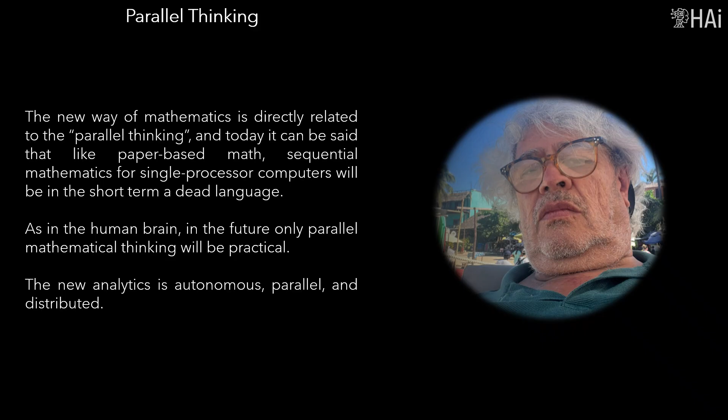The new way of mathematics is directly related to parallel thinking, and today it can be said that like paper-based math, sequential mathematics for single-processor computers, will in the short term be a dead language. As in the human brain, in the future only parallel mathematical thinking will be practical. The new analytics is autonomous, parallel, and distributed.

Oil and gas multi-problem models. OPTEX is the HAI optimization expert system which, since 1990, has been handling multi-problem models.

In 2009, Oil Express hired HAI for the design and prototype implementation in GAMS of decision support systems for the optimization of energy resources. The integrated model included production of crude oil, transportation of crude oil, oil and biomass refining, and transport of refined products. The project involved designing and implementing an integrated model that links all steps of the supply chain of petroleum products, with emphasis on the consumption and marketing of the energy used by the network.

HAI-OIL-EWO is the base for the formal implementation of the value chain model for Oil Express. At that time, the work developed was the birth of the concept of an artificial brain for the oil and gas industries.

Artificial brains are based on artificial intelligence and mathematical programming integration. The artificial brain is the evolution of DSS under the Industry 4.0 revolution, conceptualized as a set of mathematical models that exchange information autonomously between them, working online, using distributed optimization.

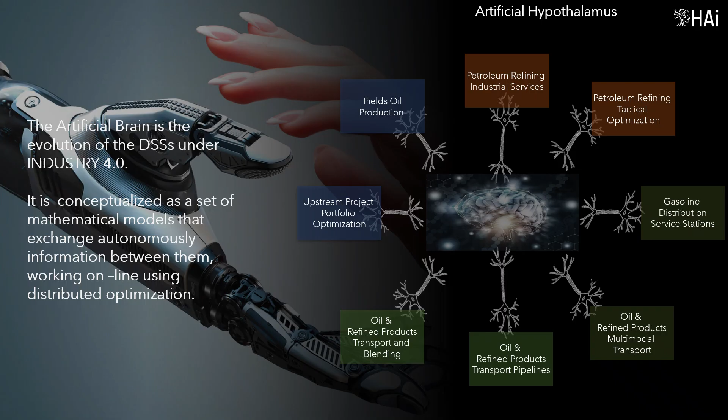When all the models that make up a company are solved using the concepts of real-time distributed optimization, an artificial hypothalamus is obtained. This is how the human brain faces reality, using multiple models of reality, acting permanently in parallel, to make decisions. The current state involves the integration of edge computing and cloud computing to implement highly complex mathematical models.

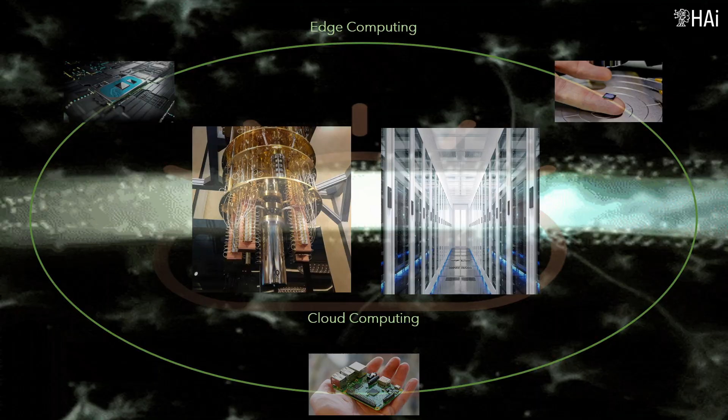Those interested in knowing more about HAI artificial brains can consult the LinkedIn article: Artificial Brains, a Swarm of Mathematical Programming Algorithms. Oil and gas artificial brains.

Oil enterprise-wide optimization integrates mathematical models for each of the links in the oil supply chain, in such a way as to manage the planning of the supply chain with a holistic vision. The design of HAI-OIL-EWO was the result of work done for a multi-business oil company. The union of models, and their coordination, forms the hypothalamus of an oil enterprise. The current computational power allows detailed modeling of the supply chain, considering individually all the systems that compose it. This allows visualization of all existing bottlenecks that affect the maximization of economic gains.

Oil enterprise-wide optimization integrates mathematical models for each of the links in the oil supply chain, in such a way as to manage the planning of the supply chain with a holistic vision. The design of HAI-OIL-EWO was the result of work done for a multi-business oil company. The union of models, and their coordination, forms the hypothalamus of an oil enterprise. The current computational power allows detailed modeling of the supply chain, considering individually all the systems that compose it. This allows visualization of all existing bottlenecks that affect the maximization of economic gains.

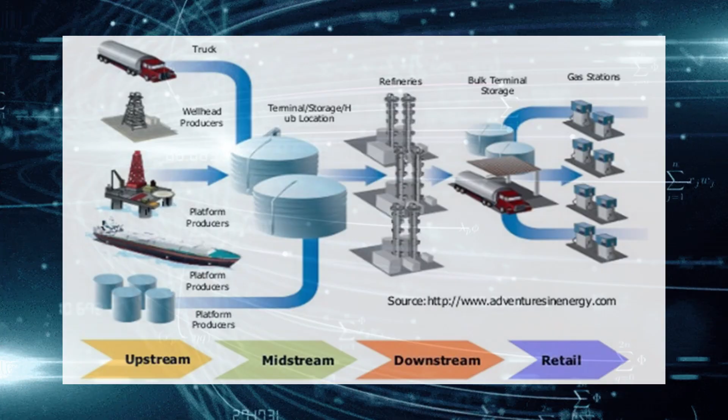Oil supply chain holistic optimization. The oil and gas supply chain is made up of four links: upstream, midstream, downstream and retail. The links are connected by multimodal transport networks. The oil sector, a subsector of the energy sector, is composed of subsectors, or links, that have strong interrelationships between them.

The oil industry begins with exploration, which aims to discover hydrocarbon reserves. After finding the oil and deciding if it can be extracted, the deposit is exploited to bring the hydrocarbons to the surface. The next stage is the transport of crude oil from the field to refineries or ports for export. Subsequently, through refining, the byproducts that represent the main use of oil are obtained.

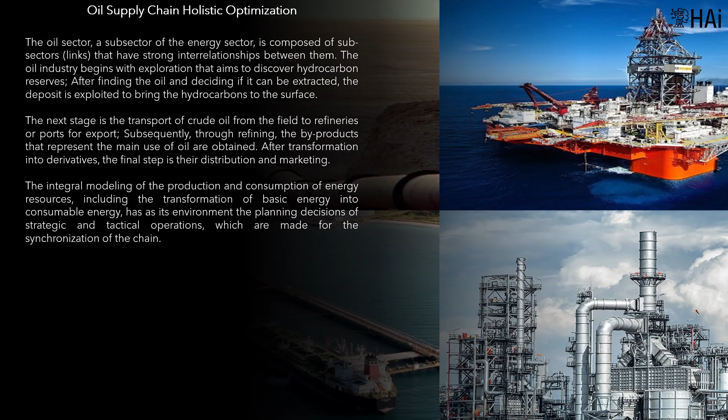After transformation into derivatives, the final step is their distribution and marketing. The integral modeling of the production and consumption of energy resources, including the transformation of basic energy into consumable energy, has as its environment the planning decisions of strategic and tactical operations, which are made for the synchronization of the chain.

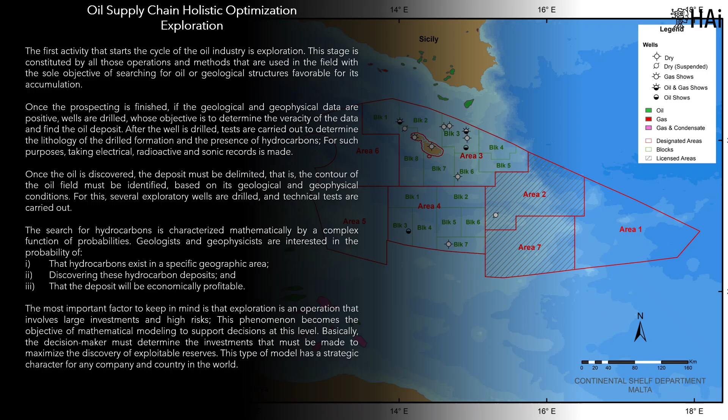Exploration. The first activity that starts the cycle of the oil industry is exploration. This stage is constituted by all those operations and methods used in the field with the sole objective of searching for oil, or geological structures favorable for its accumulation.

Production, or exploitation. The raw material of the production sector is the reserves discovered by the exploration sector. To determine the optimal production policy, production costs, losses in reserves and capital investments in drilling new producing wells, in maintenance of facilities, and in the operation of fields must be considered.

A production sector optimization model aims to determine the optimal amount of crude oil that should be produced in a field, in each period of the planning horizon.

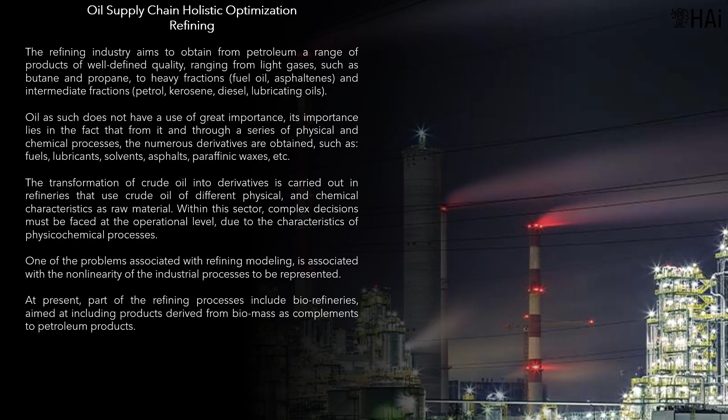Refining. The refining industry aims to obtain from petroleum a range of products of well-defined quality, ranging from light gases, such as butane and propane, to heavy fractions, fuel oil, asphaltenes, and intermediate fractions, gasolines, kerosene, diesel, lubricating oils.

The transportation and distribution of crude oil and its derivatives, whether liquid or gaseous, is an important phase of the oil industry. For this purpose, multimodal transport systems are used, consisting of pipelines, steel pipes, oil and gas pipelines, and vehicles, barges and tankers, tank cars, railways.

Trading. From an industrial point of view, the marketing of crude oil and its derivatives is carried out through two markets: free spot market transactions, and long-term bilateral contracts, and derivative financial instruments.

An important aspect in the oil market is related to the blending of oils of different technical characteristics, in order to adjust in the best way to the standardized commercial oils that are traded in the market, and to the specific characteristics of the crudes consumed in the refineries.

Energy. The industrial processes developed, along all links of the chain, consume energy in various forms and in large quantities, so that, at the wholesale level, a producer of refined products is a major consumer, and/or producer of energy.

At the same time, some links in the chain provide equally important energy resources that can be transformed or reused as part of the energy consumed.

Additionally, depending on volumes and technologies, a producer could act as a net producer of energy in the electricity, gas and biofuels markets, which have important peculiarities for the agents acting in them.

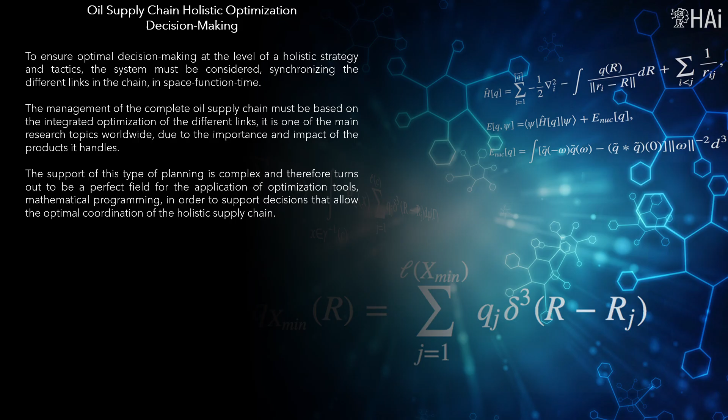Mathematical framework. The oil supply chain is the sum of facilities plus products that flow through the network that interconnects the facilities. For ease of structuring the models, the framework is followed, consisting of macro installation.

It is associated with a sector, a link, in the oil chain and is made up of facilities that together integrate the production system associated with the macro installation.

For each type of macro installation, a generic model is developed that allows the planning of the macro installation considering the exogenous boundary conditions, in space and time, the supply of raw materials and inputs to be consumed, and the demand for final products that must be processed by the facility.

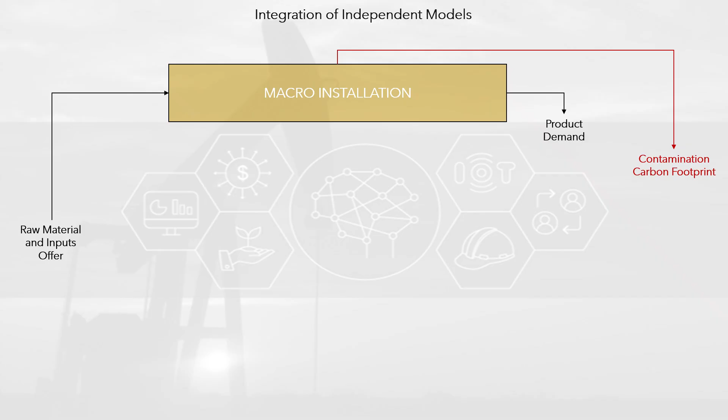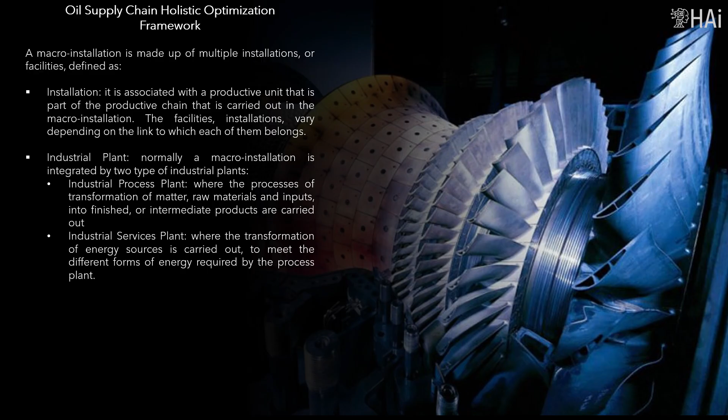A macro installation is made up of multiple installations, or facilities, defined as installation. It is associated with a productive unit that is part of the productive chain that is carried out in the macro installation. The facilities, installations, vary depending on the link to which each of them belongs.

The image presents an example of a refinery, which is composed of 5 facilities.

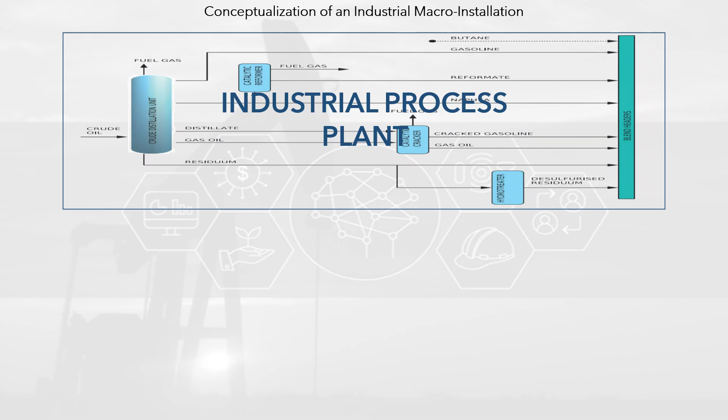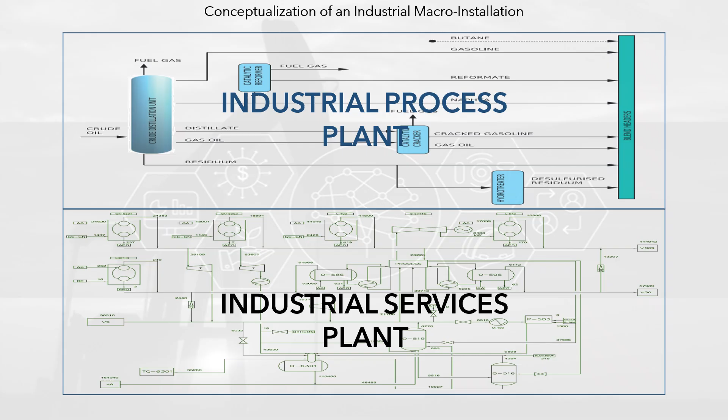Normally a macro installation is integrated by two types of industrial plants. Industrial process plant, where the processes of transformation of matter, raw materials and inputs, into finished or intermediate products are carried out. And industrial services plant, where the transformation of energy sources is carried out to meet the different forms of energy required by the process plant. The modeling of the two industrial plants can be done in several ways.

Ignoring dependency between plants and synchronizing them with good practices. Coordinate the two models, generating dependence on the industrial services model, that responds to the independent optimization of the process plant, meeting the demand for services in an exogenous manner. This is the most used modeling approach.

And integrate the two models into one, which will produce the greatest gain, both economic and environmental. The solution implies the optimal balance between the demand and the offer of industrial services. This implies endogenizing the demand for industrial services, which will be determined by the integrated model.

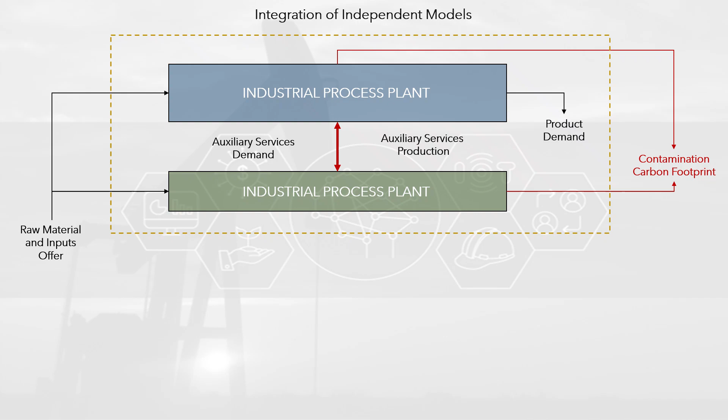In HAI-OIL-EWO, the following types of macro installation are considered. Industrial facilities, where the processes are carried out, production and refining. Agricultural facilities, where the reproduction processes and development of agricultural products with high biomass content are carried out.

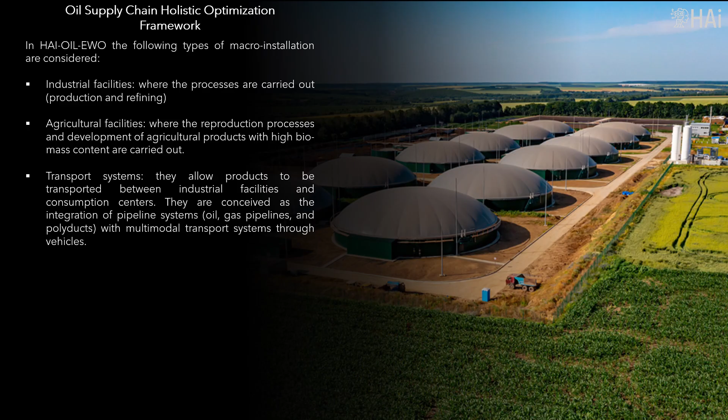And transport systems, they allow products to be transported between industrial facilities and consumption centers. They are conceived as the integration of pipeline systems, oil, gas pipelines, and polyducts, with multimodal transport systems through vehicles.

Like process plants and service plants, it is necessary to decide how the modeling will be done: independent, coordinated, or integrated. The model's integration entails the endogenization of all border conditions, offers and demands, which allows the oil company-wide optimization.

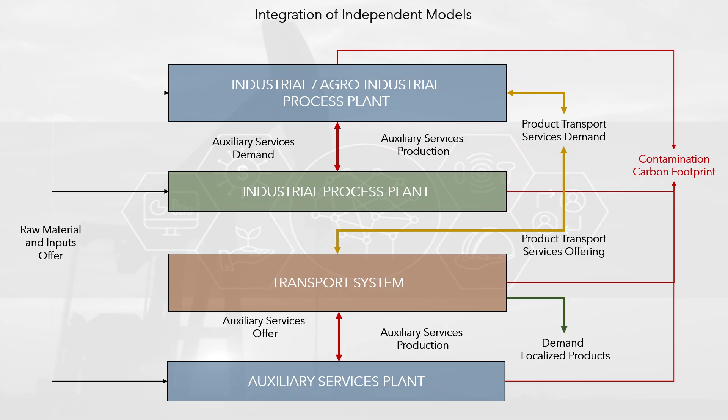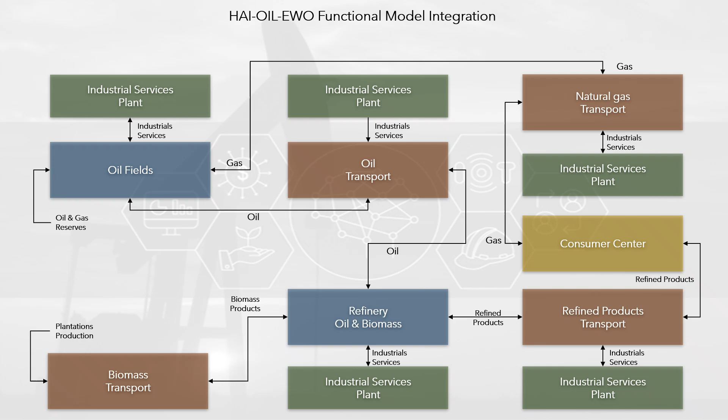Following the laws of transitivity of algebraic models, if all macro installation models are based on mathematical programming, a super-optimization model that represents the entire supply chain of a large company can be generated, following the principles on which artificial brains are based. From functional modeling, based on generic models for each type of macro installation, it must be passed

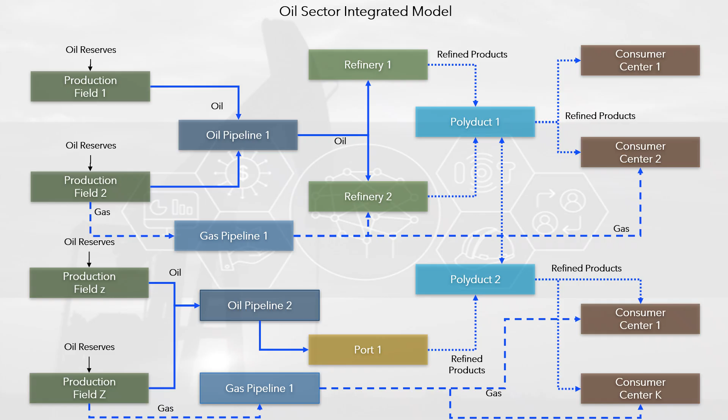to the parameterization of each physical macro installation. This setting can include restrictions that apply to a specific installation.

Connectivity between macro installations is done through terminals, sites for storage and blending of products. This concept, similar to that of superstructures, makes it possible to connect supply chains with an unlimited number of macro installations.

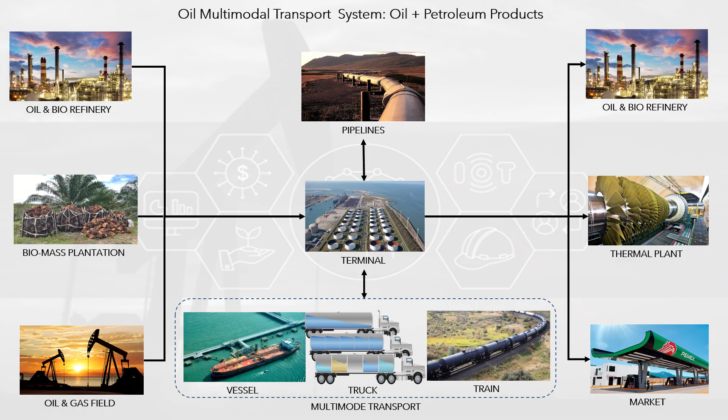The terminals are linked to transport modes, allowing the flow of multiple types of products between macro installations. Each transport mode is associated with a generic model, and together they must attend the transport services demand to meet the demand of final products, in industrial markets and customers.

All the facilities that are part of a company must be integrated through artificial intelligence models that represent them, in such a way that they holistically optimize planning and scheduling of the activities. This applies to physically connected supply chains, or to global chains that are linked through financial resources, human resources, long-distance multimodal transport systems, and markets.

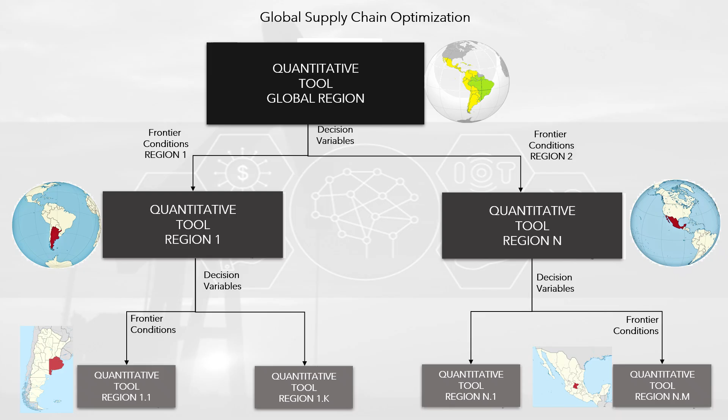The models of a region will correspond to the models of the macro installations that operate in that region. Under the concept of integration of models, it is possible to have models that make up the different regional hierarchies of the organization: hierarchical coordination of planning tools.

It is traditional to organize decisions hierarchically into strategic, tactical and operational. The operational decisions are divided into the scheduling and advanced optimal control. However, due to the technological progress generated by Industry 4.0, mainly in relation to smart metering systems, nowadays we can talk about a new type of online optimization modeling: real-time distributed optimization.

From the point of view of mathematical modeling, hierarchical levels are intertwined and coordinated through the boundary conditions in time, and common modeling that can be shared.

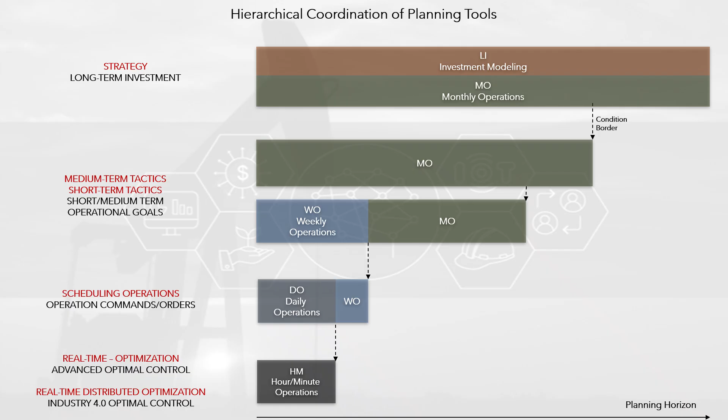The modeling strategy of HAI is that all models of a decision support system can communicate with each other. Under the principle of transitivity of algebraic formulations, models grow in complexity as they descend from the hierarchy of decisions. All models share equations, mainly those related to the physical process.

Therefore, they can be made in a continuous modeling process. The models of higher hierarchy will be more aggregated, in order to cover long periods of analysis, of the order of the years.

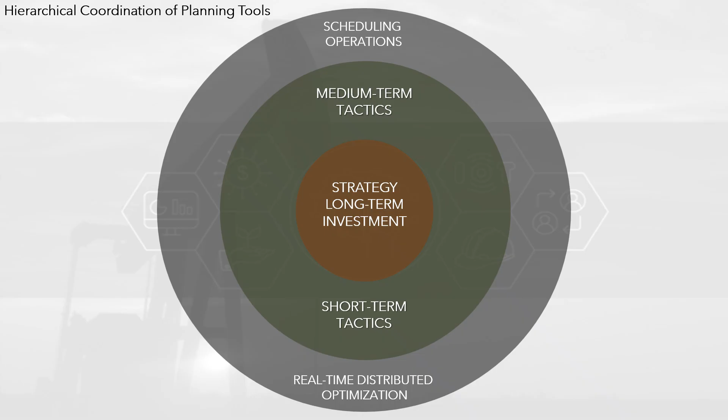The emphasis of the model should include the interpretation of the economic and technological future, so it is appropriate that they are stochastic optimized. As the models approach real time, the level of detail increases, and the planning period decreases, the most important being the engineering representation of the process.

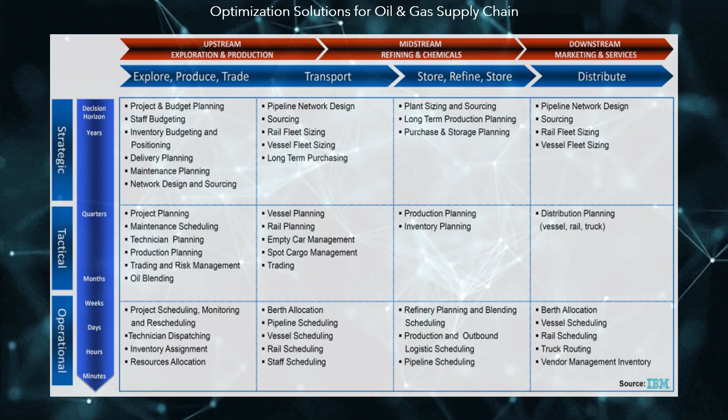HAI-OIL-EWO meets all the software solutions developed by HAI, in different areas of application of mathematical optimization models, oriented to planning and scheduling operations in different businesses of the petroleum products supply chain. To ensure optimal decision-making at the level of strategy and tactics, the system must be considered, synchronizing the different links in the chain, in space, function, and time.

The management of the complete oil supply chain must be based on the integrated optimization of the different links. It is one of the main research topics worldwide, due to the importance and impact of the products it handles. The support of this type of planning is complex, and therefore turns out to be a perfect field for the application of optimization tools and mathematical programming, in order to support decisions that allow the optimal coordination of the holistic supply chain.

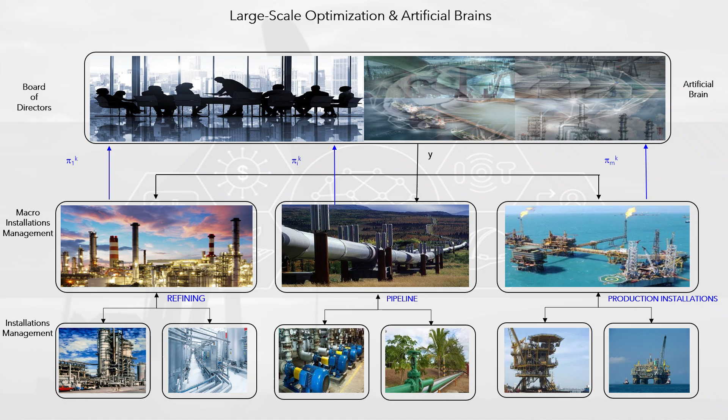Large-scale optimization and artificial brains. One of the fundamental ideas of the artificial brain is the atomization of the system, a bottom-up approach, to integrate multiple mathematical models, using the framework of large-scale optimization methodologies, like multi-level Benders theory and Lagrangian relaxation.

Given the complexity of the real world, which involves mathematical models of all types - linear, nonlinear, discrete, continuous, convex, non-convex - it cannot be thought that with a single methodology all the problems that make up an artificial brain can be solved. Therefore, it is required to have access to multiple large-scale optimization methodologies, which, using the principles of cross-decomposition, connect all mathematical problems to perform autonomous distributed optimization in real time.

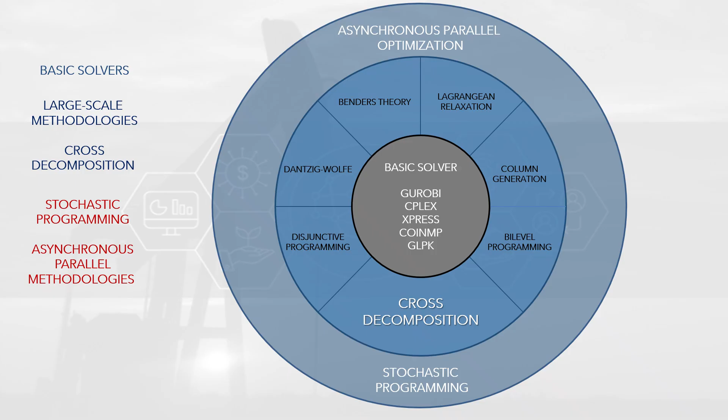Those interested in knowing more about Optex can consult the article on LinkedIn. Optex, the exocortex for mathematical modeling.

Making very large-scale models by the traditional way, using a computer programmer, is an impossible way, because the programmer can only write a limited number of lines of good source code per period. Maintaining these models can be more complicated than creating them, if more than one programmer intervenes in the process.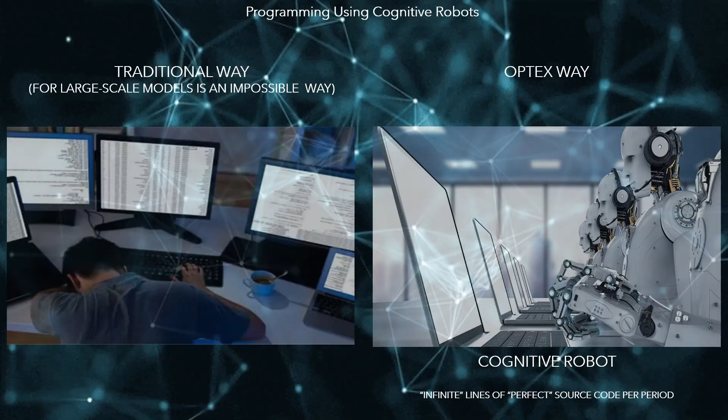Considering that Optex is a cognitive robot, that implies that Optex is able to produce infinite lines of perfect source code per period. Optimizing the oil value chain.

HAI-OIL meets all the software solutions developed by HAI, in different areas of application of mathematical optimization models, oriented to planning and scheduling operations in different businesses of the petroleum products supply chain.

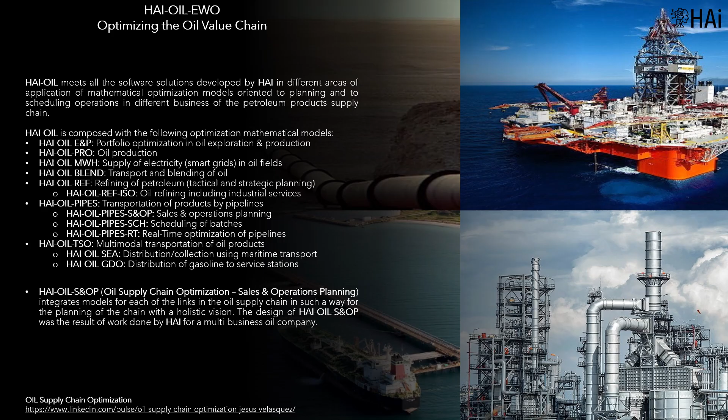HAI-OIL-S&OP, Oil Supply Chain Optimization, Sales and Operations Planning, integrates models for each of the links in the oil supply chain, in such a way for the planning of the chain with a holistic vision. The design of HAI-OIL-S&OP was the result of work done by HAI for Oil Express, a multi-business oil company.

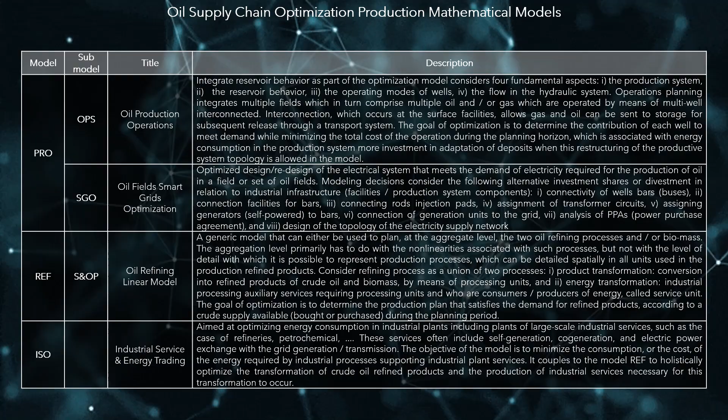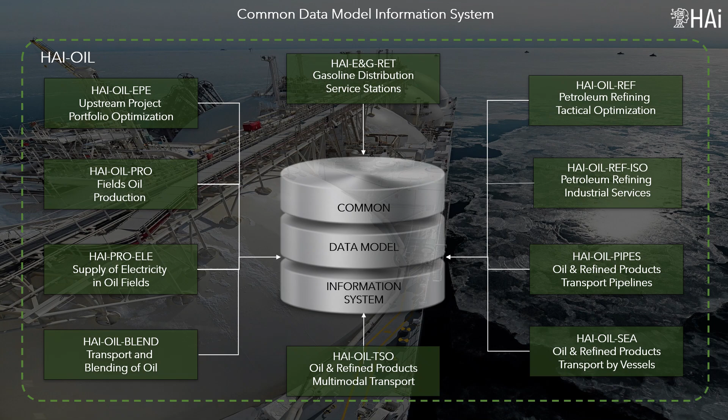In this way, the construction of the artificial hypothalamus is a question of joining the equations that make up the different models. Those interested in knowing the specific models developed by HAI can consult the article linked in: Advanced Analytics Solutions for Oil and Gas Industries.

Like Herbert Simon, hypothalamus artificial intelligence believes that computer-based mathematical modeling is the greatest invention of all times. Thank you for your attention.